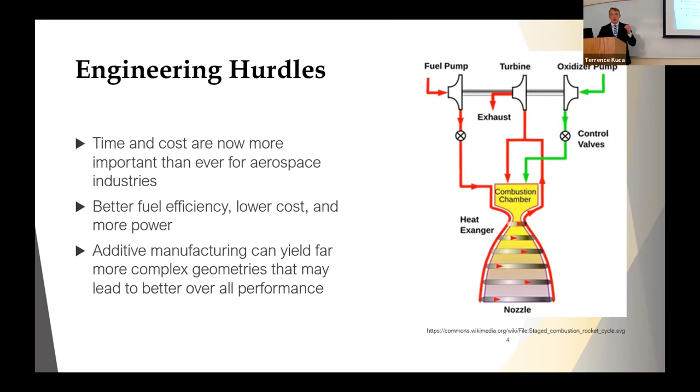Well, if we're going to be 3D printing this, we need to figure out what material we're going to start with.

The material in question to begin with is copper alloy known as GRCop-42, originally developed at the Glenn Research Center. The 42 part stands for the secondary phase you have in it, which is 4% chromium, 2% niobium, and the rest being copper. That chromium niobium phase acts as a secondary strengthening phase, so you get better properties just from having that little bit extra in there.

This here is an example of a 3D printed rocket nozzle that is quite a bit smaller. The reason for that is, although GRCop-42 has tremendous strength over a wide temperature range, still relatively speaking, when we're talking about a rocket engine, those strengths are far too small. So we have a material that is very thermally conductive, but not very strong, relatively speaking, for a rocket motor. So we want to scale that up.

Well, coincidentally, we also have another material known as NASA HR-1, or just HR-1. The closest material to it that I knew was Inconel 625, where it's fairly similar to that with a whole bunch of added stuff into it. HR1 has the benefit of being an iron nickel chromium based superalloy, and this stuff is tremendously strong. You can create it through additive manufacturing.

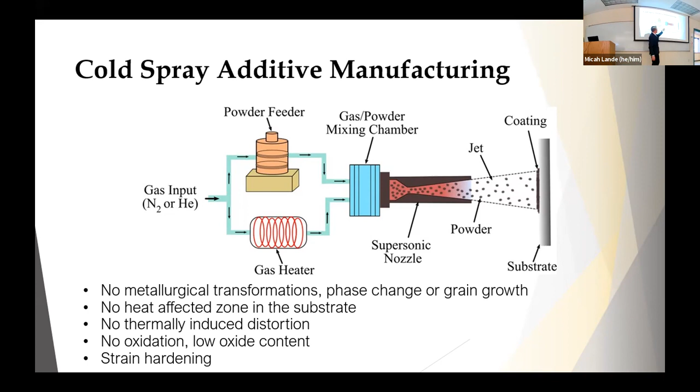Our copper alloy and our iron nickel alloy. Some of it also goes through the gas heater, which again, we're just adding energy into the system that we're going to later use. Then they mix together in the powder mixing chamber.

And then in the entrance zone of our supersonic nozzle, you have immense temperature and immense pressure. And then as it goes through there, you go through that gas dynamic process, where at the very end, your gas is going at supersonic velocities. As it goes through there, it also carries those teeny tiny powder particles through.

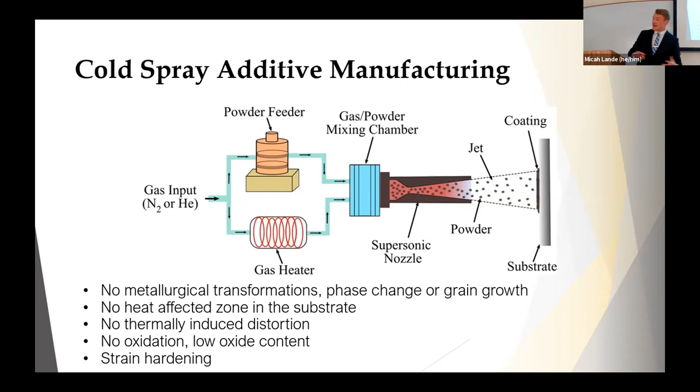And this has the benefit of, again, we can bond almost any dissimilar materials. There are limits, of course, but you can very easily bond dissimilar materials, even to different substrates or surfaces that you wouldn't even think about normally, because none of these particles go through any kind of melting process. We don't have to worry about any kind of crystal matrix changes. We don't have to worry about any kind of oxidation or corrosion, because it's completely kinetic, where none of it is melted.

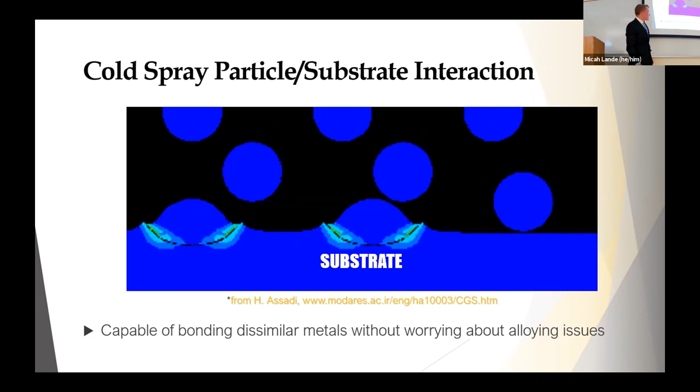All of these particles are held together by plastically deforming as they interact with the substrate or whatever you're targeting. They plastically deform together, and they're basically locked together like puzzle pieces, or like that old toy with the monkeys where you try to pull them out of the barrel and they'd all be hooked on together. The exact same thing is happening here. This is an excellent animation found just to show at a very, very small level what's going on and what we can expect.

So going into our research, we have our method, we know kind of our end goal. How are we going to go about this? Well, starting from the very ground up, we begin looking with the powder particles to basically see what they're like at that scale. Are they what we expect them to be? What's the chemistry like? What are some of their properties? And then see how that changes throughout the manufacturing process.

From there, we want to investigate how that changes as we cold spray these into an actual solid deposit. And then from there, we want to see how a lot of those properties change throughout a heat treatment process.

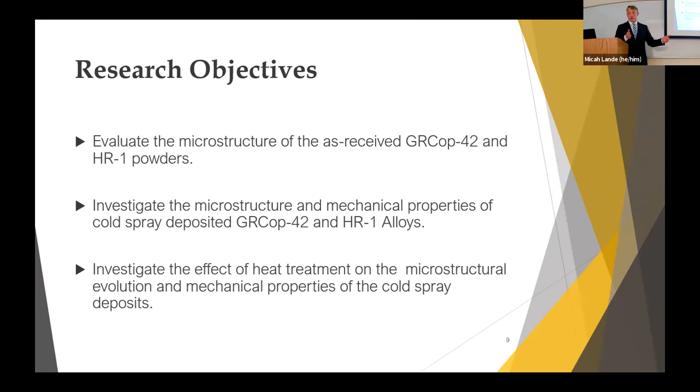And for the actual analysis, it follows almost exactly like what I was saying. The majority of this is looking at your microstructure, a lot of your metallic properties. And then as we work down, we get into more of the mechanical properties of our samples, just to get a good idea of what's going on.

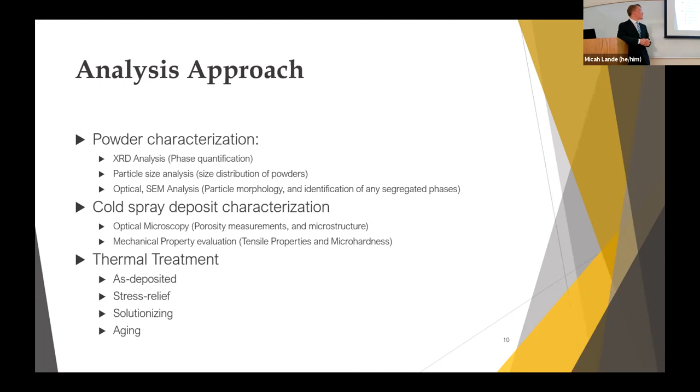To start off with, all of these samples were manufactured by VRC, using a VRC Generation 3 high-pressure cold spray machine. They were all sprayed onto aluminum blocks, then water jet off and machined, and we're left with this solid deposit, the solid structure like that. Then from there they were water jet cut out into these tensile testing shapes, which were all about 3.5 centimeters long.

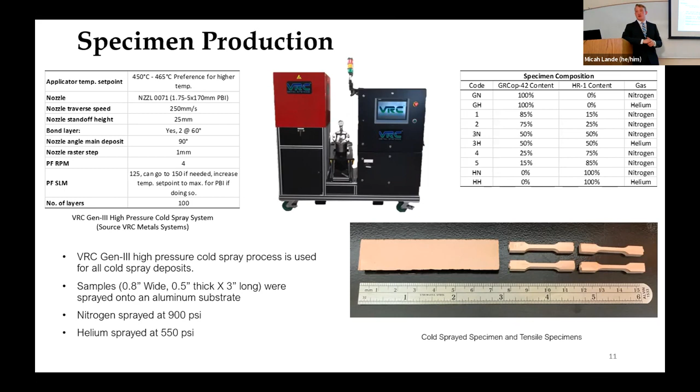As for a lot of this, there were different properties for using nitrogen and helium, but that's nothing to worry about too much right now. This is a little table just to kind of keep things straight. The majority of them were manufactured using nitrogen, and then a handful of them were created using helium. That's mainly because helium is so much more expensive, so we're kind of limited. We would like to make them all out of helium, but it's quite a lot more expensive, which I'll get into in a little bit.

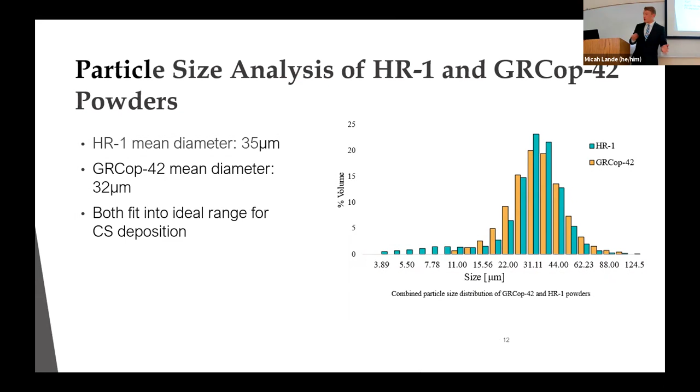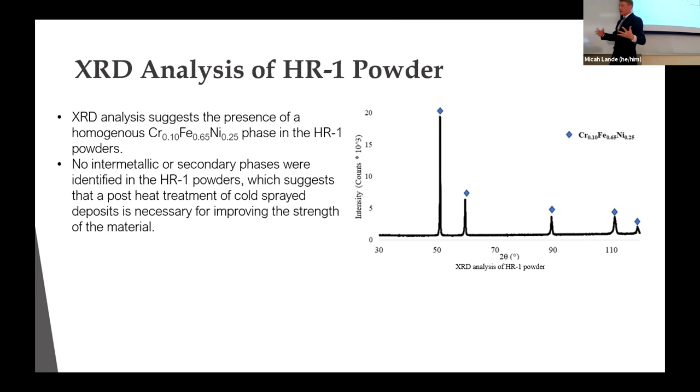And the same thing can be said taking these over to get LIBS performed on them, where they all fall exactly in the range that we would expect them to be.

Again, just vetting our X-ray diffraction and XRF, and different methods to make sure this powder is chemically what we want it to be. There isn't too much of note here, but what is interesting is we have a fairly significant iron peak on both, which could be due to some sort of contamination. That's something we need to look into in the future.

But then there is also a pretty significant helium peak, which shouldn't be there, because as most anyone knows, helium isn't typically just held around in things in nature. It always wants to go away, basically. So again, that's something to look into for the future, but for the time being, the powder is what we think it is, or what we expect it to be.

So moving on to some electron microscopy. Here we can see our HR1 powder. Again, all the powder particles are roughly spherical in shape, but they're all about the size we expect.

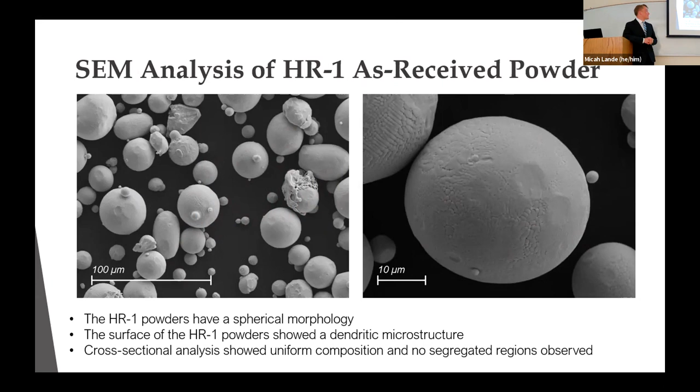We can see on the zoomed in photo here, we're getting the beginnings of a pretty good dendritic structure. And looking at that with any other forms, or with EDS, again, these all came out quite homogeneous. There's a pretty good microstructure going on there.

And the opposite can be said for GRCop-42, which is less homogeneous. This is the cross-section of a single powder particle, and we can see all these little dots are the green areas here, and that is our secondary phase, our intermetallic phase, that chromium-niobium alloy in there.

And that leads to it being a dispersion strengthened material, meaning that this will not benefit as much as HR1 from having a heat treatment process. But again, these phases are very small, which is one of the things I want to touch on in the future. They're very small to begin with at 75 to 700 nanometers, but they're pretty evenly dispersed.

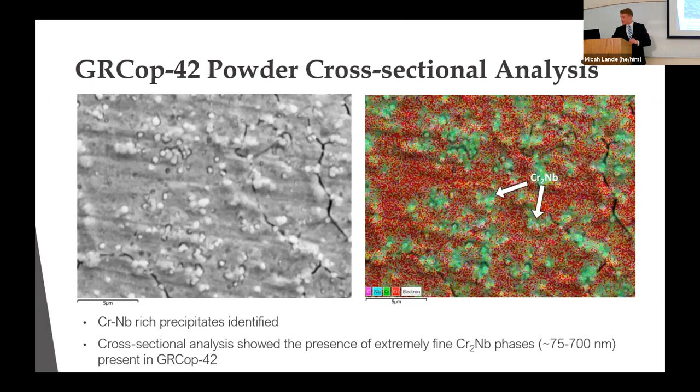So then going on to looking at actual cold spray solids, this is a couple of interesting, very close-up views of nitrogen and helium sprayed HR1, where you can see a pretty distinct difference in the plastic deformation for our helium sprayed, where things are much more stretched out and elongated versus the nitrogen sprayed. This shows that for our helium carrier gas, we're getting very good deposition, and it's also creating a better metallic structure, which also shows up when we get into mechanical properties.

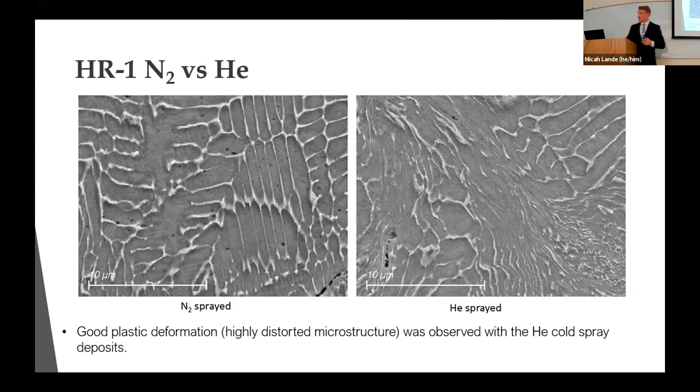The same thing can be seen here on an optical microscope level, where on the left we have our nitrogen sprayed, and you can pretty clearly make out just about everywhere any kind of a boundary in between the different particles, and also significantly higher porosity. Versus for the helium sprayed, this is much more compacted together because they're able to fly at such a high velocity thanks to that boost from the helium gas. Again, our porosity here is significantly lower.

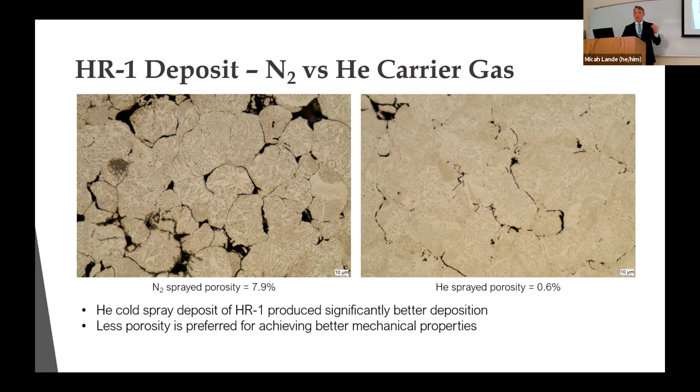So all that shows us is interesting reasoning for the changes in mechanical properties. This exact same thing can be seen with our copper alloy, not quite to the same extent, just because our copper alloy, of course being copper, is a little bit softer, so it deforms quite a lot better. But again, we see a lot less boundary lines between those individual particles.

So again, that's just showing that the helium sprayed ones definitely are going to have a lot better properties. However, that does still come at the cost of using helium, which is about 10 times more expensive to use than nitrogen.

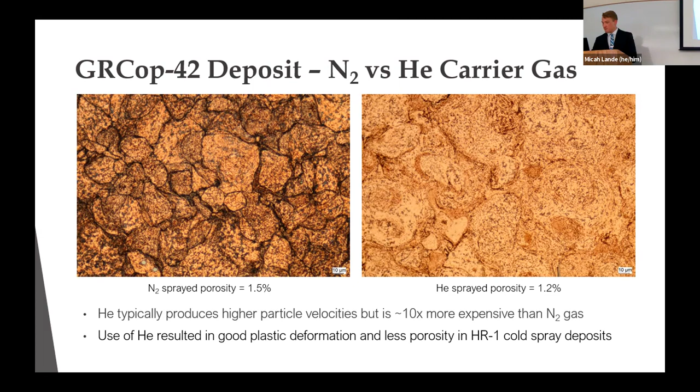So then taking our solids through the heat treatment process. For the beginning of it, we kept some aside to act as our control group in the as-deposited state. Then we started with an hour and a half at 982 Celsius for stress relieving. After that, it's furnace cooled, meaning we just turn off the furnace and let it cool for as long as it needs to come to ambient temperature.

Afterwards, it's boosted back up to close to the same temperature, but for just a little bit longer in order to solution treatment. And then while those samples were still red hot, orange hot, white hot, they were pulled from the furnace and immediately sprayed with argon gas in order to quench them as fast as possible.

And then after that, they're thrown back into the furnace for another 16 hours at a lower temperature, and then furnace cooled again to a slightly lower temperature for another 16 hours, forcing me to come in at 3 in the morning several times to make sure the furnace actually changed temperatures. That was fun. Either way, at each one of these steps, we have samples being taken out so we can see how things change throughout the heat treatment process.

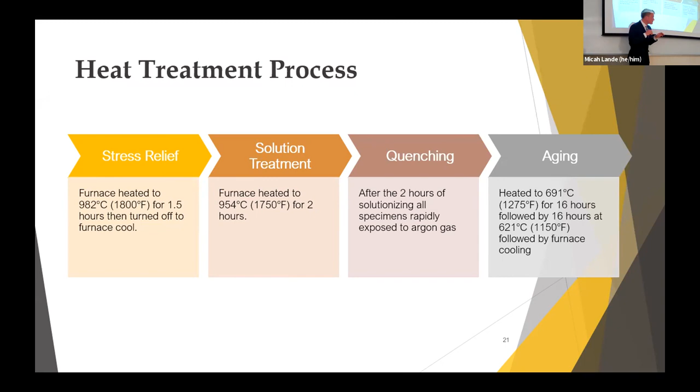So then starting with some of the mechanical properties, going into the micro hardness testing, in each one of the states from left to right, we have a pure copper alloy moving over to our HR1, and in between we have different ratios of them, 75/25, 50/50, and such.

We can see pretty clearly at the start, in our as-deposited state, we have an increasing micro hardness with that increasing HR1 content, which makes sense. It's a significantly stronger material, not as soft as copper, so that fits with exactly what we imagine it to be.

Then as we go into the stress relief process, we see overall that hardness is lowered by a pretty significant amount, mainly because after that stress relief we're giving those particles a chance to relax and reform their microstructure. That internal stress, brought on from the plastic deformation caused by cold spray, is lessened a little bit. So we have better bonding, less internal stress, thus lowering our hardness.

The same thing happens when we go in for solutionizing and quenching, where hardness is again brought down. But what's interesting is that the higher copper content deposits don't change all that much, while as you increase the HR1 content, those come down quite a lot, mainly because HR1, unlike GRCOP 42, is not dispersion strengthened, so it's more susceptible to heat treatment. After the aging process, we see some of them ramp back up to similar hardness levels as before, but again, this is just one of many properties.

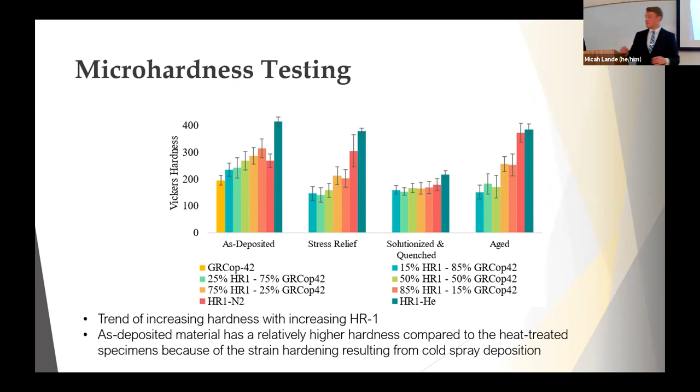So then after the micro hardness testing, going into tensile testing, these graphs are laid out the same way, where we go from left to right through the heat treatment process, and then also left to right in each step we have our higher copper content to our higher HR1 content, with mixtures in between.

In the ultimate tensile strength graph, these peaks that you see, especially this one carrying throughout, are the helium spray samples, which, as I said before, lets us visualize the benefit of using helium spray rather than nitrogen spray, because all of those particles being more bonded together and squished together thanks to that extra velocity, they're able to retain much better physical properties. Especially with the HR1 solid, that was tremendously strong stuff.

In the as-deposited case, a lot of this was fairly low, with helium again being higher. Going into the stress relieved stage, it was all raised by quite a lot. Then after the full heat treatment, meaning the solutionizing and aging steps, that's where we get into some of the biggest differences that still need to be investigated, such as why our helium sprayed copper alloy actually ends up lower than nitrogen, which is the opposite of what we'd think.

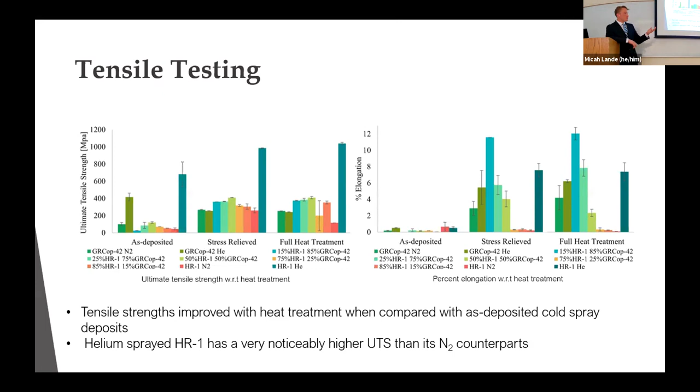But as we go through the heat treatment process, especially with the copper alloys, we can see that elongation develops much better—we get much better percent elongation from the tensile tests. However, as I said before, that percent elongation for all the samples is definitely lower than what we would want, especially compared to directed energy deposition, an example of a thermal additive manufacturing method. So higher strength, a little bit less ductility in our samples, but that's the trade-off going on there.

From there, we can also see, as we go through the heat treatment process, our microstructural changes. Here, this is our HR1 helium sprayed sample.

This is the same picture as before, where we can see things are pretty plastically deformed and stretched out. As we go into the first heat treatment step, we see those particles are able to reform. They're able to relax and recreate the expected crystal structure. And then we also see the beginnings of some interesting, very long, very needle-like crystal structure forming.

And if you remember me saying at the beginning about HR1, it has another crystal structure that we don't want to see, which is the eta phase. That is a nickel titanium rich phase, and it essentially acts like a stress concentrator, and it's especially susceptible to hydrogen environment embrittlement. So we don't want to see that, and seeing that much of it on that scale is not a good thing.

However, going into our solutionized step, we see a lot of that is pretty significantly reduced, almost gone altogether. But then after going into the full heat treatment, we see a lot of that reforming. However, now, instead of it being kind of randomly across everywhere, it's distinctly along these intercellular boundaries, which is exactly where we don't want to see it, because that's already where the stress is the highest. And then on top of that, we add what is a stress concentrator and what makes the metal more susceptible to oxidation and corrosion. That's not good, and that's something as well for future research.

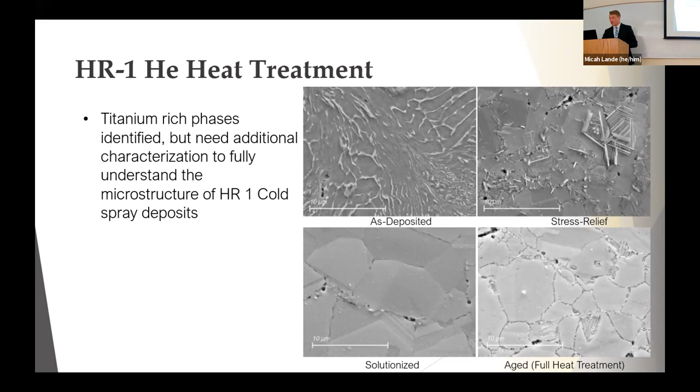And then we see something similar but different happening with GRCOP42 as it goes through the heat treatment process, where at the very start, we can see, like I said before, all of these secondary phases, these little tiny dots there are very, very small, only ranging between like 75 and 700 nanometers, so less than a micron in diameter. However, as we go through our heat treatment process, we see these particles begin to grow, and they begin to kind of gravitate together to make bigger, coarser particles. And that's also part of the reason why some of the mechanical testing as we go through the heat treatment process has lower values than we would expect.

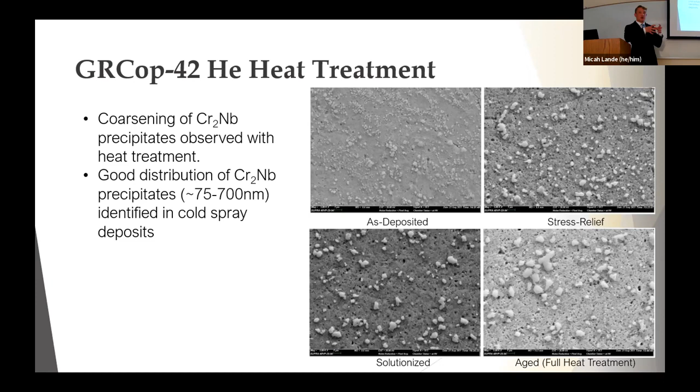Mainly because these particles are good to have, this secondary phase is good to have. However, when they start lumping together too much, we lose that dispersion strengthening because it's not stopping our material from moving around because they're all clumped together so much.

This unfortunately was one sample we weren't able to look at with SEM, and that's kind of more future work that we would like to do, because that's of particular interest. If we're talking about creating a bimetallic layer with this stuff, or a bimetallic solid with it, we really want to know, well, okay, if we have eta-phase growth, is it happening at the same time at these boundary layers in between our copper alloy and our HR1 alloy, or is it just in the HR1 alloy? So those are things that we unfortunately ran out of time for, however, that is on the docket for future research.

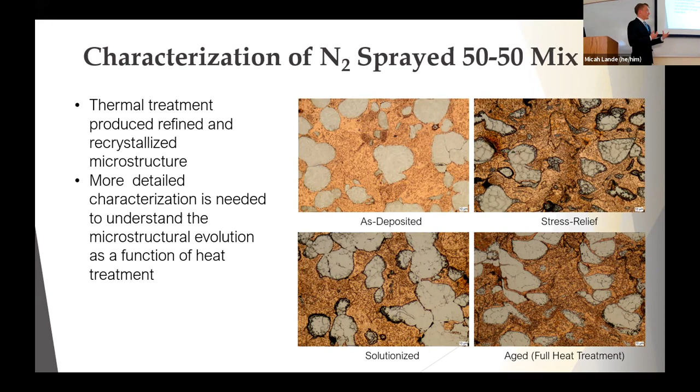Doing pretty good on time.

In conclusion, wrapping up, we were able to look at the powder particles and get a good characterization of them. We were able to look at some of those properties and sort of how they vary between the two materials, again relying on, or falling back to exactly what we expect them to be. And then going through the cold spray process, we were able to look at how those properties from the powder state change to the solid state, and we were able to see some of the mechanical properties of that as well.

Going through the heat treatment process, seeing how those things change. One of the most significant things of this research was seeing the difference between using nitrogen gas and helium gas, mainly because it would obviously be better to have it cheaper, produced with nitrogen. However, if we don't have a material that's strong enough, that's also not good. So as with anything, there's always a balance that has to be achieved.

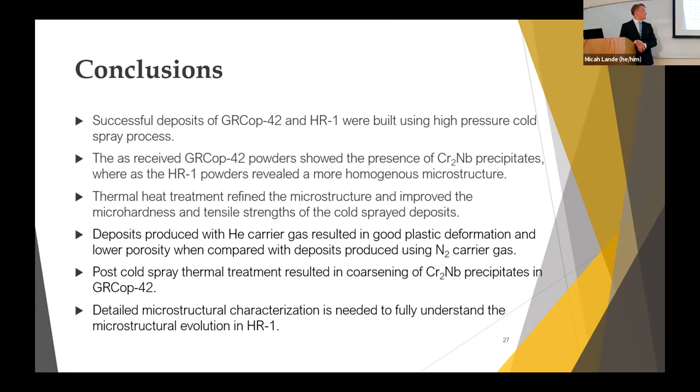Going into future plans for future research, currently the largest bit of it is expected to be a balance between taking what we already have and, through trial and error, figuring out with the heat treatment process what we can do to decrease some of those problems, like the growing secondary phases. If we only need to take it into the furnace for an hour and those are the best properties possible, then you go with that.

We would also like to do hipping, which is hot isostatic pressing, I believe. Basically, another form of heat treatment where you're compressing the solid in order to get rid of some of that porosity. That's another process we would really like to look into, and that's definitely on the docket for future research.

The other big thing is using a number of different methods to identify in the HR1 alloy that secondary eta phase. Although we are able to see that secondary phase and see that it's titanium rich, those crystals are so thin, even on a microstructure or micro scale, that it makes it almost impossible to identify through the methods we've already used, like XRD, SEM, or EDS. So there are a few ideas for analyzing both secondary phases for both materials.

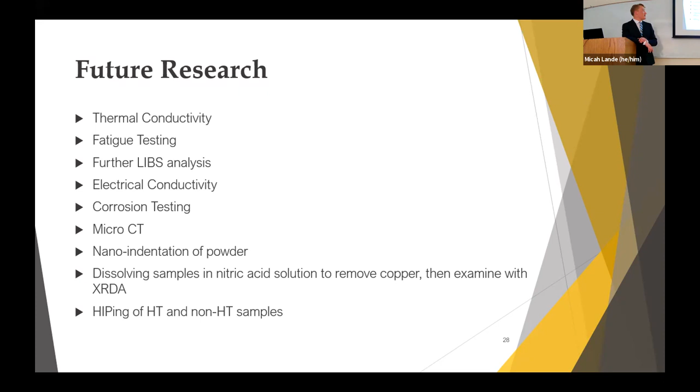Majority of that, of course there are other ones. Oh yes, and further LIBS analysis, because that's something I've talked quite a few times with you and Dr. Dvacher about in order to get a better idea with some of that stuff.